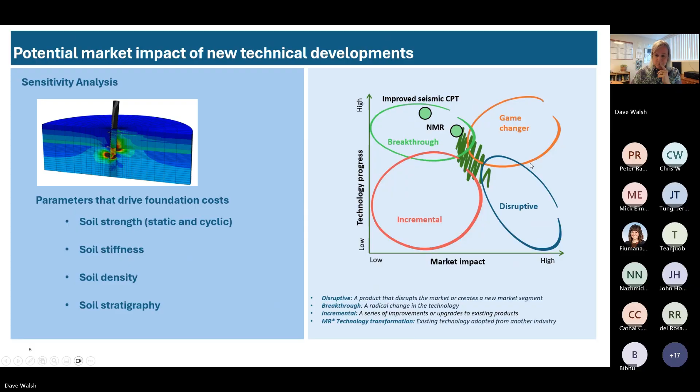So as part of their internal research, Ørsted and another institution also performed some laboratory work to establish the relationship and the suitability of using in situ magnetic resonance measurements to estimate, in particular, density. And they found through these measurements that in situ NMR measurements of porosity combined with the a priori assumption of grain density is a very accurate and very precise way of estimating the bulk density in situ.

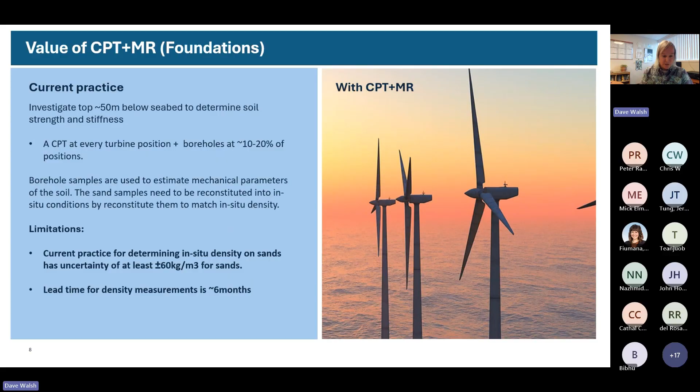So what is the value of reducing that uncertainty? Well, they even went one step further than just establishing the differences in uncertainty. They looked at how much money they could save if they started to collect in situ NMR data and use that, at a minimum, to reconstitute their soil samples for their laboratory tests of actual stress tests.

And so for foundation designs in particular, the bottom line is they come up with a conservative estimate that they can save up to $9 million for every 100 turbines, just in terms of the cost of steel. So if they don't have to over-engineer their foundations to cover the uncertainty from traditional methods, they can save a significant amount of money just in the cost of steel.

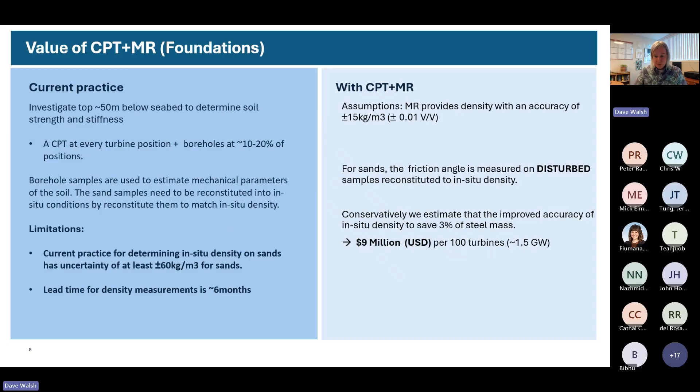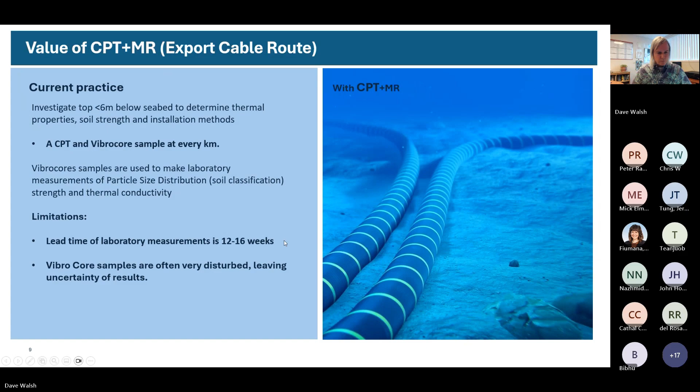Similar results with assessments of what's the economic advantage of applying CPT and NMR for cable route surveys. So that's sort of the overall overarching motivation for this. In this case, we've got an assumption that if they acquired a CPT and NMR every kilometer, they could save half of their vibrocore costs, soil sampling costs, and save $500,000 for a 100-kilometer cable route.

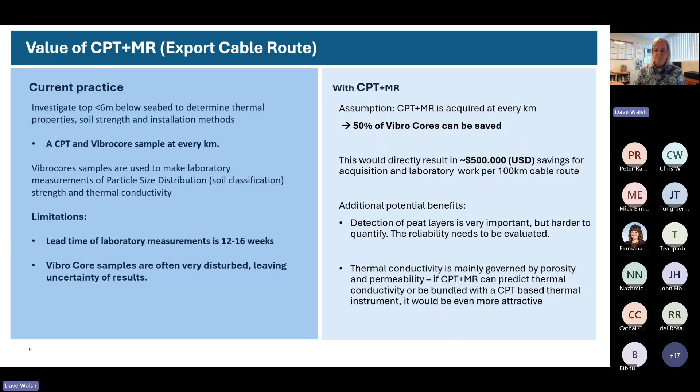Okay, so I'm going to talk about nuclear magnetic resonance. So this is probably new to a lot of people on this call. So if anybody has any questions when I'm going through how NMR works, please just pop up a question, and one of the moderators will relay that to me.

So NMR is basically a method for detecting hydrogen. So it's inherently non-invasive, and what we're doing is we're detecting the hydrogen atom attached to the H2O molecule. And we detect basically its magnetic moment. So not all atoms have a magnetic moment. Hydrogen does, because it has a single charged particle and it's spinning. So it's kind of like having a little current loop, and that creates a dipole moment. And that's what we're detecting, the magnetic moment of the hydrogen. So if you've got a hydrocarbon fluid, you would also detect that hydrogen through NMR.

So this method has been used in the pharmaceutical industry and organic chemistry very widely for about 50 years. It's a key analytic method for probing the structure of organic molecules. NMR is also the basis for medical MRI. So if anybody here has ever had a medical MRI scan, you were basically subjected to an NMR measurement. And in this case, you have a certain type of instrument that has a superconducting magnetic field generating coil. The patient goes in to the middle of that coil, and NMR measurements are used to basically map out water and tissues in the human body for the purpose of diagnosing injuries and disease.

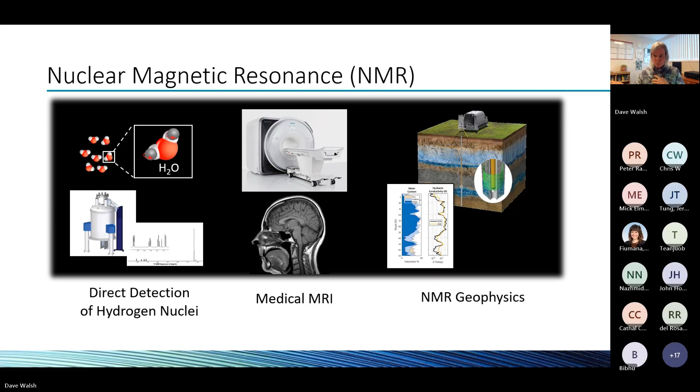So in our case, we're using the same physics, but in a different form, and for a different purpose. So we're basically using NMR to detect water that's in the ground, and also to determine what are the properties of the sediment that holds that water and that can transmit that water. So the relationship between NMR and hydrogeologic properties is really what sets it apart from other geophysical methods and other geotechnical methods.

So here's how this works. So basically NMR is detecting water in the pore space. You don't detect the rock sample or the sediment sample itself, just the water that's in between the pore spaces, and in some cases adsorbed to the material itself. So if you've got twice as much water in your sensitive zone of your instrument, you'll get twice as big of a signal. So your NMR signal has a form like this. It has a particular resonant frequency, it has an initial amplitude, and the signal decays over time. So that initial amplitude is directly proportional to the amount of water that's in your zone. So it's a direct and linear measurement of porosity. And in geotechnical terms, it's a direct and linear measurement of void ratio, water-filled void ratio. So that's really interesting and valuable on its own.

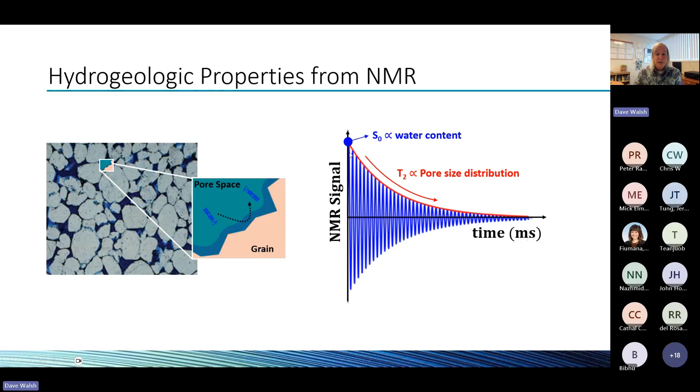But the other thing about the NMR signal is this decay time. So the thing that governs the decay time is actually the pore size. So water that's in large pores like this one here, the NMR signal exhibits a long relaxation time, a long decay time. Conversely, water that's in very small pores like these, the NMR signal exhibits a very fast decay time. So just by looking at the nature of that relaxation curve, you can tell if the water's bound in very small pores or if it's available to move or to drain in very large pores.

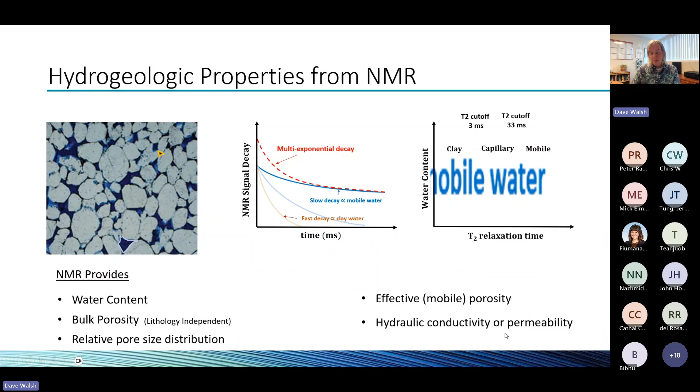Ultimately, NMR is giving you key hydrogeologic properties of sediments and rock formations, including water content, porosity, a relative pore size distribution, and also estimates of the effective porosity or the drainable porosity, and even hydraulic conductivity. Okay, so that's the background on NMR. We can come back to that if there's any questions.

So here's the concept of the CPT and NMR tool combined. The concept is you have a seabed deployed CPT system, and you have a single tool that gets pushed down from that CPT rig. It measures CPT on the way down through a traditional cone, and it measures NMR response while retracting back up. So you get both sets of data in a single push from the same sensor. And it's done from a seabed deployed CPT rig.

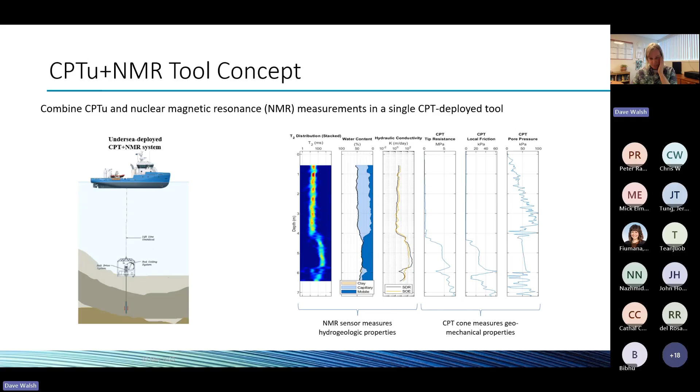So a couple of the engineering challenges to develop something like this: the NMR sensor itself has to be made very small and still maintain a reasonably large diameter of investigation. This particular type of NMR sensor actually senses in a very thin cylindrical region that is displaced from the side of the tool. This is important because you've got a lot of compaction and disturbance happening right in the immediate vicinity of the CPT tool. So the NMR sensor is actually not sensitive there. It's sensitive several inches outside of that.

Okay, so the second engineering challenge here is that you have to have a non-conductive section in your housing. NMR works by basically transmitting and detecting alternating magnetic fields at relatively high frequencies, and those magnetic fields will not penetrate a metal housing. So there has to be a section of this housing that is non-metallic. And the whole tool, of course, has to be able to survive these very large static pushing forces. In our case, we're pushing with up to 100 kilonewtons with this tool.

So on the right here, this is actually an early prototype of the CPT NMR tool. You can see the cone down here. It's got a 15 square centimeter cone. And in the body section of this tool, in that yellow section, is where the NMR sensor is.

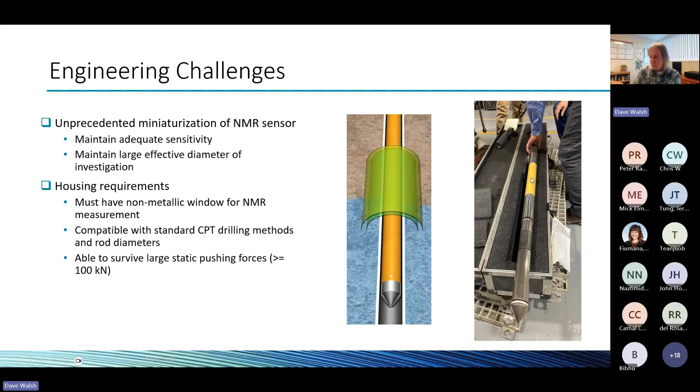Okay, so the current specifications, in case anybody's really interested: it's about 5 feet long, from the tip of the cone to the top of the drive head. It is nominally 48 millimeters in diameter at the maximum point, which is right here. You can push it with 36 millimeter OD or 45. You could push it with 55 too. You just have to change your drive head for whatever type of push rod you're using.

Got a 15 square centimeter cone. The NMR sensor has very high vertical resolution, about 5 centimeters. Short echo spacing, that's an important parameter for being able to measure water in silts and clays. And that's about it.

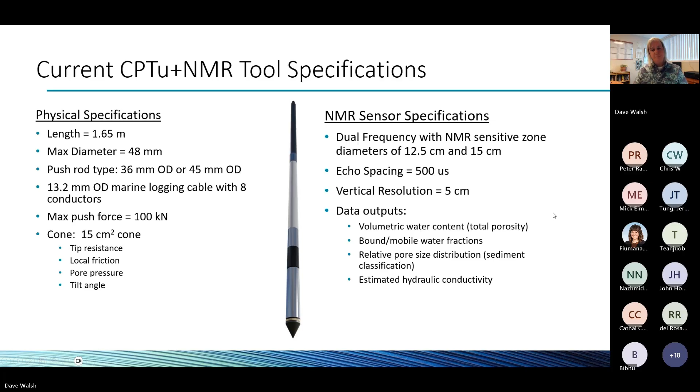Okay, before I get to any data examples, I just want to explain what you're going to be looking at with the NMR data. So the raw data, as a function of depth, this axis is depth. The raw data is actually in units of time. So you've got basically an amplitude, a signal that's decaying from left to right. Wherever you see a long signal like you do here, that's because you've got water in large pores that has a very slow decay time. And conversely, here you've got water that's decaying very quickly.

Okay, so the first step is to fit this data to a multi-exponential model. That gives us this plot, which we call the T2 relaxation time distribution. You can look at this as basically a relative pore size distribution. Wherever you see a brighter yellow or red, that means you've got water at that relaxation time. Long relaxation times over to the right correspond to water in large pores like sands and gravels. Water way over to the left corresponds to water in small pores like silts and clays. So if you start at the left at about 1 millisecond, you're looking at hard clays, soft clays, silts, fine sands, medium sands, coarse sands, and if you had any gravels, you'd have a signal way over here.

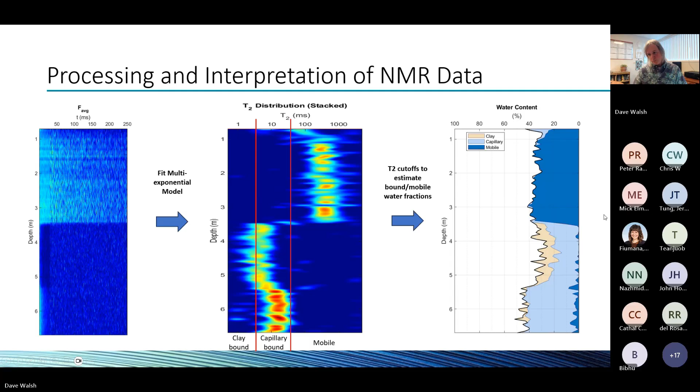Okay, here's an example of using the CPT NMR tool on land. This was in Kansas. We have basically unconsolidated sediments down to about 14 or 15 meters. There's shale at the bottom of that. In this case, we have a water table at about 5.5 meters, and these are mostly fine sediments in the upper zone. So you see that even in the unsaturated zone, we're detecting a significant amount of water content, and that's expected because you've got fines there and they tend to hold water even when it's unsaturated.

Your CPT data is over here. It shows a lot higher friction because this clay is drier. Then below the water table, we have mostly fine sediments to about 8.5 meters, although there is a little bit of sand right here. And then there's a pretty contiguous sand and gravel aquifer.

Do we have a question? If not, I'll go forward.

So there's a sand and gravel aquifer here. You can see this clearly from the relaxation time. Comparing the CPT and the NMR data, they're all consistent with each other. CPT data is basically showing you how much force you need to push through this stuff, how much friction you're experiencing, and whether you see something that indicates some sort of a hydrostatic line. Whereas the NMR data is giving you quantitative numbers on volumetric water content, porosity, effective porosity, and hydraulic conductivity, and an ability to really see these finely structured differences in the distribution of sediments here.

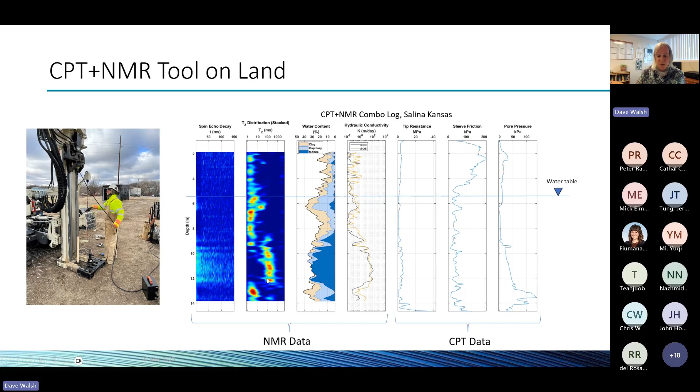A second example is using this tool from a jack-up barge over a lake near New Orleans, Louisiana. In this case, we got very soft lake bed sediments. Not terribly interesting, these curves. It's very soft, not much resistance, not much friction, except for where you have some sands mixed in here and there. But with the NMR data, you also get total porosity and total water content.

And you can see some interesting differences, like where you've got a little bit more sand mixed with silt, you have a lower porosity. And that's because the sediment is less well sorted, right? And that leads to a lower porosity. And you can also get quantified estimates of hydraulic conductivity.

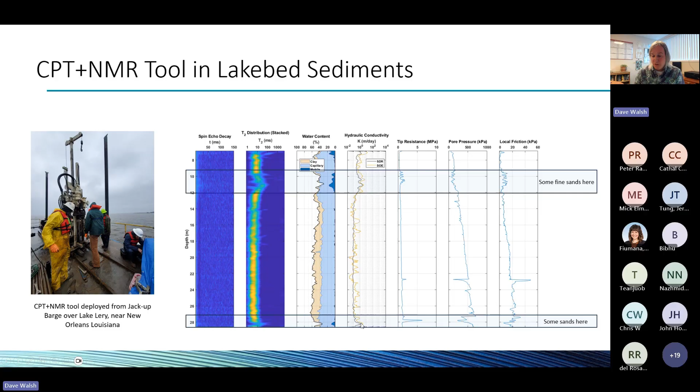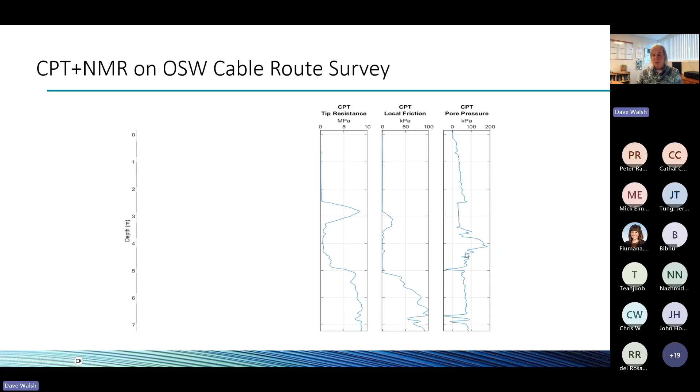Okay, one more example. In this case, we've got soft sediments again, and then boom, we hit this increase in the resistance. The friction also rises somewhat, but it's a little bit offset, delayed in depth versus the increase in tip resistance. Got the indication of a permeable zone here from the hydrostatic line, again down here. And then it's again a little bit ambiguous what's happening below that. So one question I usually ask people: which of these two sand units has a higher density? I'll let you just guess. And then I'll show the NMR data.

So this sand unit has a lower porosity. See that 30%? Whereas this one's more like 40%. So this one actually has a higher density. And it's also coarser. These are much coarser sands. You can see that from the relaxation times. That's a pretty long relaxation time compared to this down here.

And then up in these soft sediments, you've got more like 60% porosity through there. Previous site, 50%. And then in between these two sand units, you've got a very high porosity data point right there at about 70%. So it's some very soft, very watery material right there.

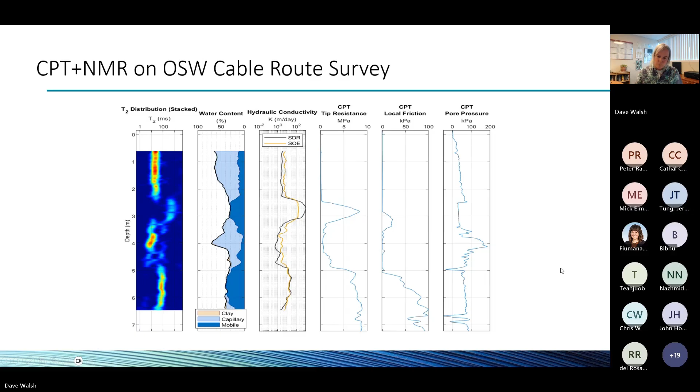And even down here, you see that it's mostly sand in this lower section where things get a little confusing with the CPT. Mostly sand, but there are some fines mixed in. And so it's shown clearly in the NMR data. In fact, you can tell what the fraction of the fine pore sizes is compared to the coarse-grained pore sizes. Okay.

So we see the benefits of this particular tool compared to existing and traditional methods of sampling the seabed. One, it's an in situ measurement. You don't have any disturbance or alteration of the sediment properties. It's measuring it in its native state. Two, it's continuous. You don't have loss of sample like you're always going to have with soil sampling, in particular with sands.

Three, it's rapid. You can collect the CPT and the NMR data in a single push. It really doesn't take a lot more time than collecting the CPT data on its own. And when you're offshore, the big cost is, of course, the cost of the vessel and the crew and all those other things. It's not really the CPT equipment that's costing all the money. It's all those other costs that go into getting that thing out there.

The results are immediate. So all the data I've shown you, when that data is being collected, you can see that final result in real time as it's being collected. So there's really no delay in having a completely end product that you can analyze and start doing some engineering analysis of.

So lower cost, it's faster because it's a CPT measurement. It's faster than drilling and sampling. It's faster than borehole logging. And there's no cost for transporting samples or for doing laboratory analysis. And finally, I think the NMR will over time be seen to be able to provide an improved ability to classify sediments compared to just having the CPT alone.

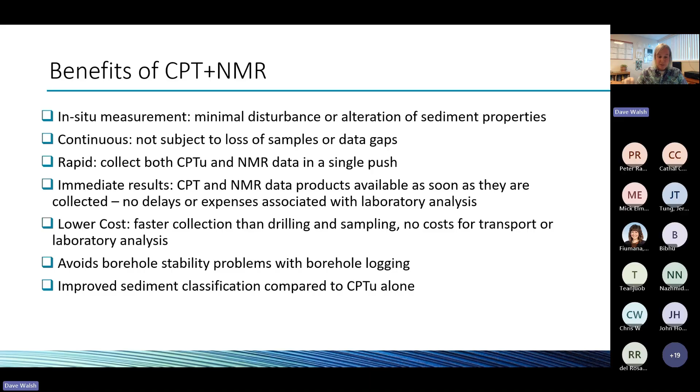So finally, just a few potential real world applications of the NMR in these offshore wind applications and other energy applications. So one is density. In situ density is an important parameter for foundation design in particular. And with sands, if you're relying on core sampling, the sand samples are frequently lost. They're disturbed. They're compacted in some cases. They get looser during transport, whatever. So there's a lot of uncertainty when you take a core sample, a vibrocore sample, and send it to a laboratory, and then use that sand sample for stress testing.

So if you've got an in situ measurement of the porosity, then you can basically use that information to recreate that same condition in the lab on that core sample that you do have, and then perform your stress testing. So this is a way that you can potentially reduce project risk and also reduce project costs because you don't have to over-engineer the foundation.

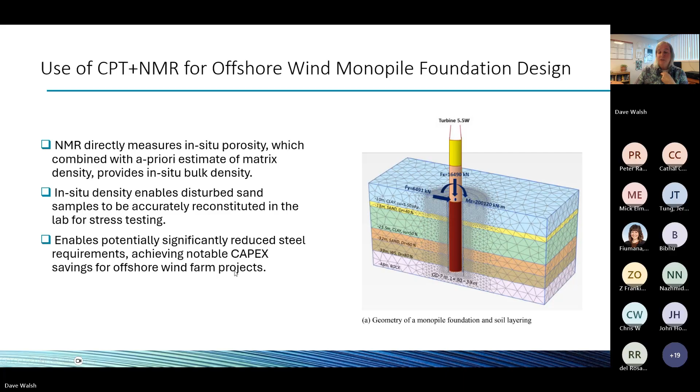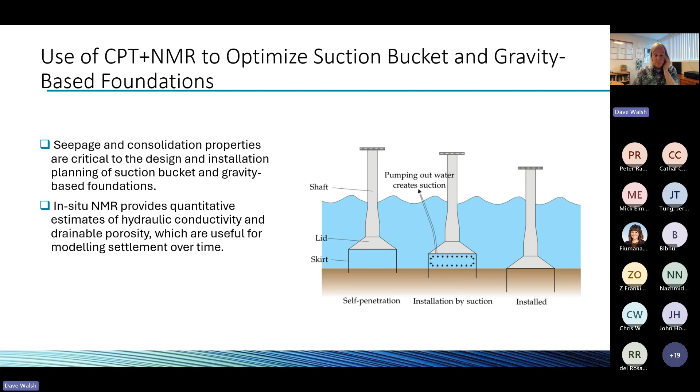Okay, second thing to consider is for some types of foundations, hydraulic conductivity and drainable porosity are other important variables to how the foundation is going to settle over time, or how it's going to initially be installed. So for example, suction bucket, where you have to pump water out and that water is coming through the sands and whatever the sediments are. So NMR provides quantitative estimates of hydraulic conductivity and drainable porosity. And those are useful if you want to model what's going to happen.

So for export cables, I don't work for an energy company, but I know people who do, and they say basically these days they just can't wait for the laboratory analysis. They rely on CPT and soil sampling and laboratory analysis, but they have to order these cables years in advance of when they need them. And current practice is just too long of a delay to be able to use any of that information from the laboratory.

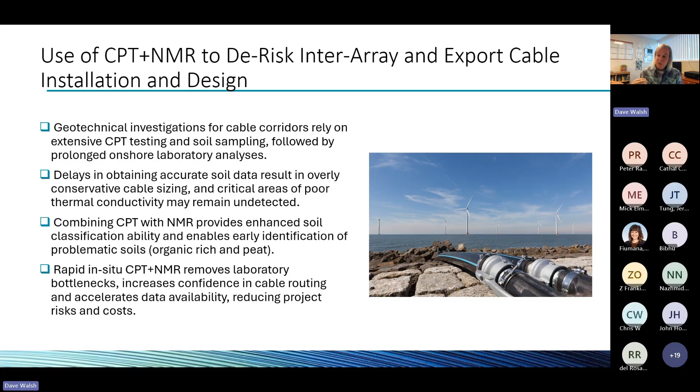So if they can get data quickly at the very early part of the site investigation using CPT and NMR and get a lot of these risks identified, particularly organic rich sediments and peat, which can cause overheating of cables, then that's potentially a big deal for reducing risk of cable failure in the future and reducing costs of cables in the current.

Okay, finally, there are other applications. This has been focused on offshore wind, but it's a general problem. Seabed investigations for pipelines, cables, hydrogen, drilling platforms. They all have similar site investigation needs. So all of these benefits of combining CPT and NMR into a single tool are going to be able to transfer to these other energy applications as well.

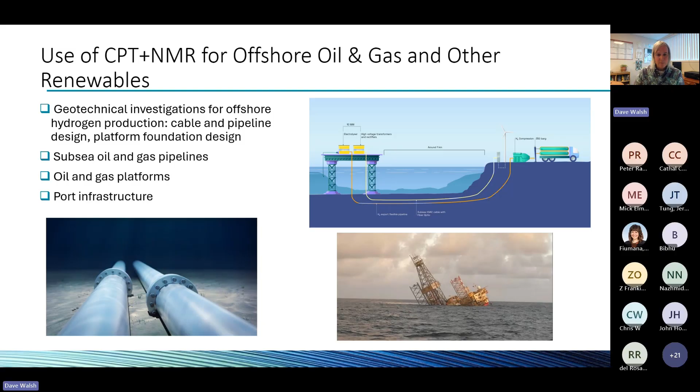All right, so in conclusion, this development was driven from the industry itself. We're a small business in the U.S. and we didn't actually come up with this idea ourselves. People from the energy industry, offshore wind industry in particular, came to us and asked us if we could do this. And it's driven by the bottleneck right now caused by the lengthy geotechnical investigation phase.

So combining CPT and NMR in a single tool can resolve some of the key challenges that industry is facing. And combining those measurements can reduce the scope and delays of onshore lab programs, reduce uncertainty, and reduce the engineering costs associated with that uncertainty.